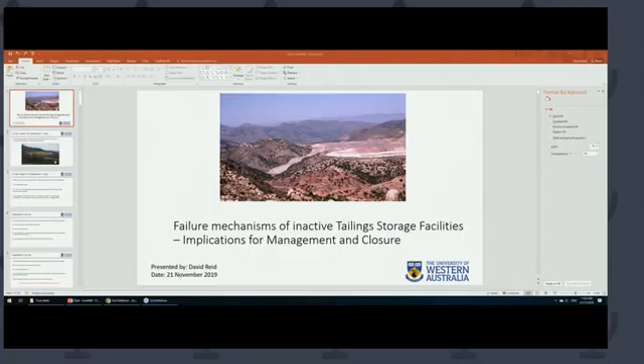The reason for this was I met some IMM members at an event a few months ago, and they were talking about the importance of tailings failures. When we talked about a potential topic, we formulated this for the closure group, because I understand this is the group of people most interested in the closure aspects. So it's to do with mechanisms of failure, or relevant mechanisms that still need to be considered after a tailings storage facility, or TSF, is either closed or fallow, or not having deposition.

This title slide right here is actually the Pinto Valley failure that happened in the late 90s in Arizona, on what was a closed TSF that closure works were happening on. In that case, waste rock was being placed on top as a cover. So it's not unprecedented that this can happen.

Now the real reason we're talking about it today, and that it's come to the focus today, is that the failure that happened in January this year in Brazil was a fallow TSF at the time of failure, and had been fallow for about 3 years. So that's something that I'm not sure...

A lot of people are aware a failure has happened. I'm sure some are aware there was no active deposition happening at the time. But that's interesting in a sense, because I think there's certainly a preconception, which is usually right, that once deposition stops and once things start to drain down or dry, things get safer, and that is generally the case. But there are still plausible mechanisms that can occur.

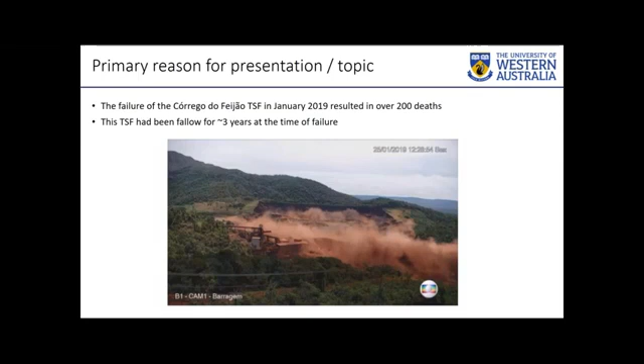I don't want to get into that because it's just speculation until all the data is out there. But the important thing to note is, this thing is looking, prior to it moving, there's very little externally visual evidence that it's about to happen. And that's what happens with very brittle, loose, saturated tailings when instability occurs. It can be very quick, and there can be very little warning.

And that's important for a number of reasons, because a lot of the things we talk about in terms of risk control is monitoring, daily inspections, walking over the TSF, which is great and useful, but not all failure mechanisms are going to be detectable a day before because of cracking. It can be a relatively small event that can take something like this TSF we're looking at here, that was already potentially in a very bad state. That final event that can cause this to happen doesn't have to be that big.

The reason that's the case is because of events that have happened over the past 10 years, for example, but that last event that causes it can be quite small. That's particularly important to think about in a closure context where we might have a fallow TSF, and the things that we're doing to them in a closure work sense are often relatively small. But if, unbeknownst to the closure team or to the people in that situation, it was already in a very delicate situation, even those small types of closure activities could be enough in some cases.

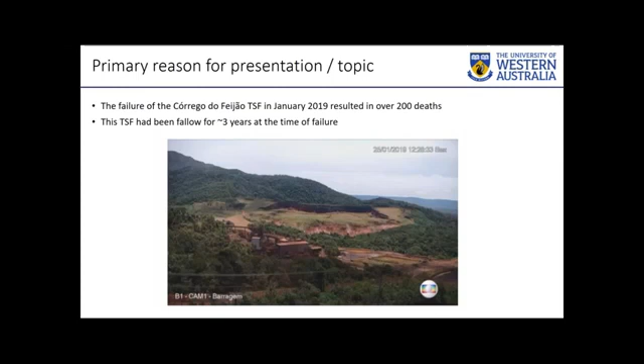Going back a step, I think it's fair to say there's a perception that when a TSF stops deposition, drain down things start, drying starts, that it generally gets safer. And that is correct, almost universally. But even if those things are happening, there are still plausible failure mechanisms that remain, even after it started to drain down a little bit or dry a little bit on the surface. And it's quite possible that something that was, because of the way it was maybe designed or operated, was pretty close to failure on the last day they turned the spigots off. And two years later, things might not be that much better.

So maybe it's 5% safer, but it might have been really close to the line already. And when we see the number of tailings failures happening, there clearly are probably a minority, but not an unappreciable minority, of tailings dams that might be in this situation. So we need to be careful whenever we start being responsible for changing things to a TSF.

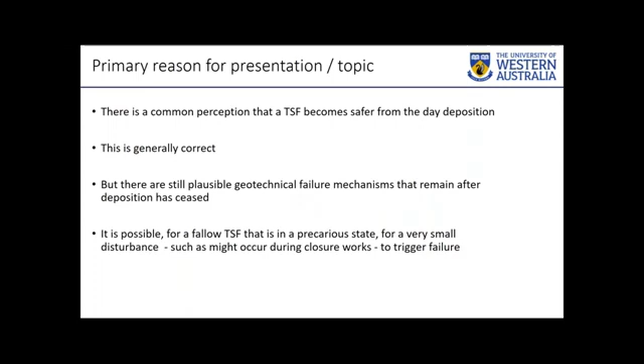So today, what I want to talk about is just a really high level background on some of the relevant soil mechanics principles that I think you need to be across in order to understand how these things happen. I understand the group isn't geotechnical engineers, so I'll keep it as high level as I can, but hopefully it's of interest when you're trying to read about what's happened on these things.

And then I want to discuss the types and rates of drain down we could see on some fallow TSFs by looking at some very conceptual models of what drain down would look like, which can be quite slow. I'm sure many of you who've been involved in seepage modeling or monitoring of a closed TSF will be aware of that.

Then I want to examine some case histories, some of which are closed TSFs, and at least one is not a closed TSF, but what happened there could still be relevant to a potentially closed or fallow TSF. I'll discuss the failure mechanism, summarize what we see in those case histories, and then offer some thoughts on what I think you'd want to look for coming at this from a closure works perspective.

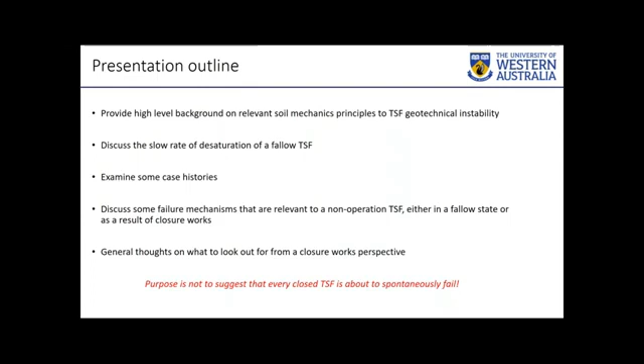Like what kind of things to think about at a high level that you want to make sure have been done. But I don't want to just be a panic monger and suggest that every single tailings dam, in this case every single fallow tailings dam TSF, is about to fail, because that's really not the case. I'm not saying that at all, but clearly we all would agree we need to be sure we know what the situation is in the ones we're working on. That's the real message.

Just to go through a really high level discussion on how soils and tailings behave: they're what we would call frictional materials. By that I mean their strength is a function of the stress acting on them. So the more stress that's on them, the more shear strength you have. And the way to link those two, in a simplified sense, is what we call a friction angle.

You can measure the friction angle of a sandpaper block on a desk. You apply a vertical stress by putting a weight on top of it, or using your hand, and then try to move it. You'll find there's usually a near linear relationship between the stress you put on top, acting down, and how much stress you need to apply sideways to make it move. That is what we call the friction angle, that linkage.

And so different grades of sandpaper have a different friction angle. A really coarse grade of sandpaper on a rough desk is going to take more shear stress to move, all else being equal. That's what we mean by frictional strength.

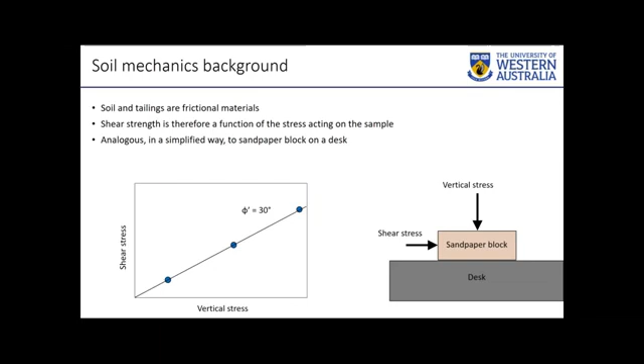It's not like concrete or steel. We don't normally think about how much stress is acting on a steel beam in a confining sense, usually in terms of how much tensile or compressive strength it might have. A steel beam is a steel beam generally. With soils, it's very much how much stress they're under that determines how strong they are. So things that reduce the stress can therefore make them less strong, which can be dangerous.

Similar to different grades of sandpaper, different types of tailings and soils have different frictional strengths. Beach sand might be in the low 30s, 30 degrees. An angular gravel material could be 45, anywhere in there. Clay can be in the low 20s, and tailings usually fall somewhere depending on the tailings, but you don't get many 20-degree friction angles in tailings. Usually they're a bit more angular because they've been more recently created and potentially broken down, so they might be more angular than a natural sediment that's had time to be eroded or rounded. So in general, friction angles might be a bit higher on tailings, but that's not the main point.

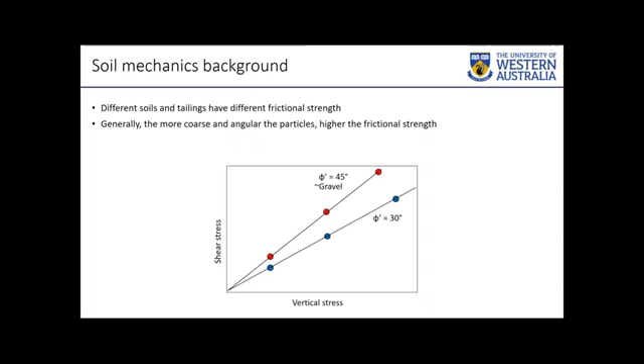The main point to get across with soils is, yes, they're frictional and their shear stress is controlled by the stress acting on them. But for soils and tailings, it's the effective stress that governs, not the total stress.

Effective stress in soil mechanics is the vertical stress acting on that sandpaper block from gravity, minus whatever water pressure might exist in between the sandpaper and the desk. In the sandpaper-desk analogy, it's hard - you'd have to really contort this to put water pressure into that situation.

In a soil 20 meters below the surface, clearly it's going to have water pressure acting on it of varying amounts depending on where the phreatic surface is. The higher the water pressure, the harder it is for the particles to touch each other and put pressure on each other, and that reduces the effective stress, which reduces their frictional strength. So they're frictional materials, but water gets in the way, you could say. The more water gets in the way, or the higher the pressure of it, the lower the strength is.

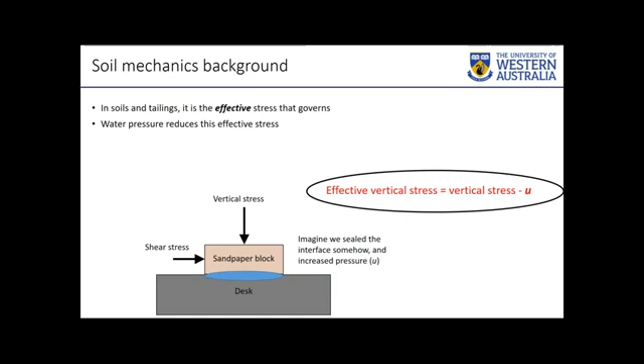Things that cause that can be very dangerous for tailings dams. Water is the key, and it's the key in a whole bunch of different ways, not just geotechnical behavior, but it's key here as well. That's why when you look at schematic plots of shear stress versus vertical stress, it's vertical effective stress that you'll see used in soil mechanics, and that's what matters - the effective stress. The water pressure makes a big difference in terms of the mobilized shear strength you can get.

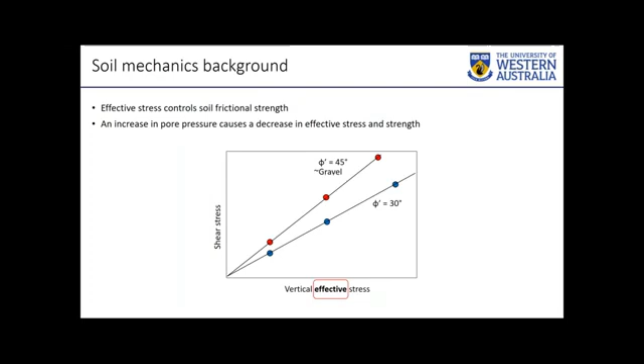So it's important to think about what is going to cause those pore pressures, the water pressure that prevents strength from existing inside our tailings. Vick, who's written a lot of great stuff on tailings, summarized it nicely into three broad categories. Number one, probably the most intuitive, is a high phreatic surface. The higher the phreatic surface in a tailings or soil deposit, the higher the water pressure at a given depth, and therefore the lower the effective stress in that element of soil, which means lower strength.

Another one that's probably quite intuitive is rapid placement of fill, or a cover, or a next wall raise on top of underlying tailings. That load, that instantaneous loading, can produce additional pressures in the water that are above those you would assume if you just calculated them based on the phreatic surface. We call that a form of excess pore pressure, and that's pretty well understood, at least in the geotechnical community.

Number three is the trickiest one. I'll be honest, a lot of people working even in tailings struggle with this one, and that's shear-induced pore pressure - the process of particles being sheared causes them to collapse and increase pore pressure. This is almost certainly what's documented in the failure that happened in Brazil. You see this in every geotechnical tailings failure: loose tailings, when sheared, collapse, try to reduce in volume, and the pore pressure goes up. I'll show schematics to explain that, but that's usually the most risky one and the one that happens fastest.

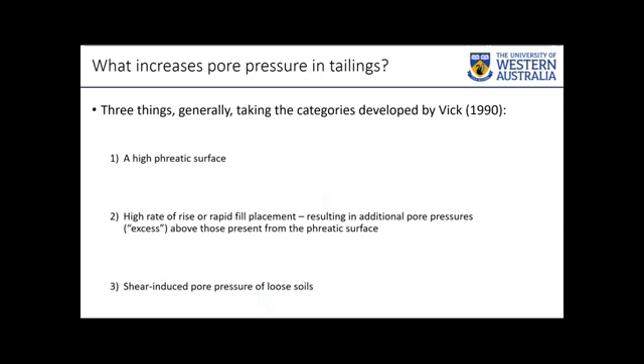Now, the high phreatic surface one is again probably the most intuitive. Even if you're not a geotech, you're aware: high phreatic surface is bad, low phreatic surface is good, generally. So looking at a rough schematic of an upstream raised TSF, let's say we're looking at this element of tailings here, and we're worried about it from a stability point of view - the strength that it has might control whether this slope is stable or not. If we have phreatic surface 1, the effective stress acting here is less because the water pressure is greater.

So this whole system is more risky with phreatic surface 1 than with phreatic surface 2. That's, I think, straightforward.

What's interesting is if you have this slope and it's not in great shape, and you go from phreatic surface 2 to phreatic surface 1, that reduction in itself can trigger a failure. And that rise can be slow - there's a misconception that it has to be some kind of rapid event. It could gradually rise over a year. And if, at that point, things are not stable, the failure will occur, and there might not be that much warning depending on the type of tailings.

So phreatic surface is key. Again, this is why almost certainly closed or fallow TSFs are considered safer, because usually you're going to be moving from 1 to 2. But the key question we'll talk about later is how long is that going to take? Because it can take a long time in certain materials.

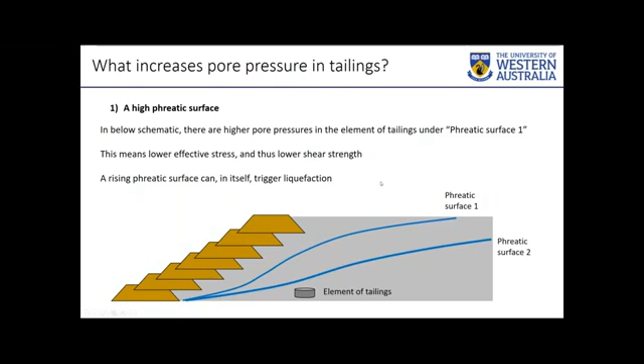Now, excess pore pressures is the term we use to describe pore pressures that are higher than you would calculate based on the location of the phreatic surface. Because if you know the location of the phreatic surface, you'd say, okay, this element of tailings is 10 meters below it, so it's 10 times 9.81, and that's how you calculate pore pressure - 98 kPa.

But if you, for example, load this quickly by placing a bunch of waste rock here in a hurry, or building a wall raise, or even depositing tailings really quickly, what happens in soil is the water bears the load initially. If you load something very quickly, it's the water that bears the load, not the soil, and therefore the water pore pressure goes up. The water can't get away fast enough to dissipate that excess pore pressure. So clearly, if we do things like this - placing load rapidly - it could increase the pore pressures beyond what we think they are, which again can be a trigger for failure.

So that's something to keep in mind, because this becomes relevant, in particular, to when you're closing a TSF. The key question then is: is the tailings still saturated? Because if it isn't, putting that load there might not be as much of an issue, since it can't generate water pressure anyway, because the tailings aren't even wet in the first place. But that's another discussion for a few slides.

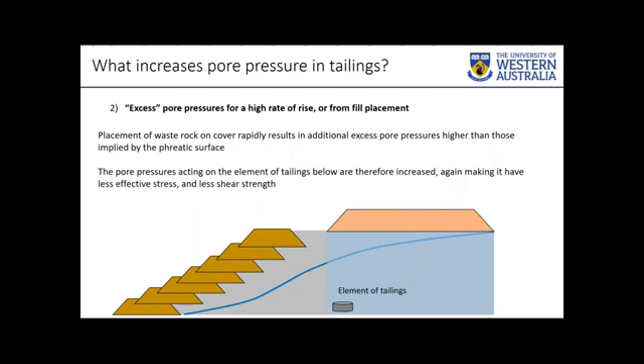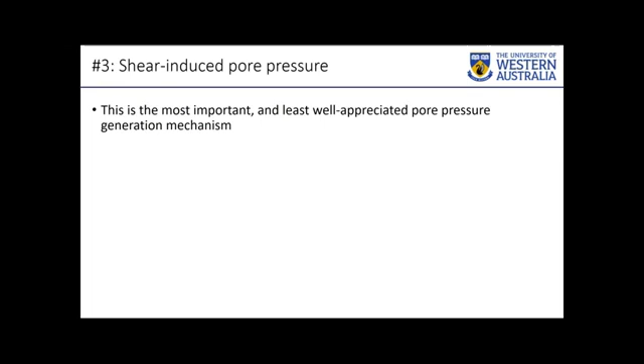Now, shear-induced pore pressure - it's really important to understand what causes this, because it's so relevant to tailings, and it's hard to understand a lot of the failures without a high-level understanding of this. Let's imagine another one of these PowerPoint schematics of an element of soil in some sort of lab device that lets us shear it. It doesn't really matter - we don't need to get into the nitty-gritty of lab testing.

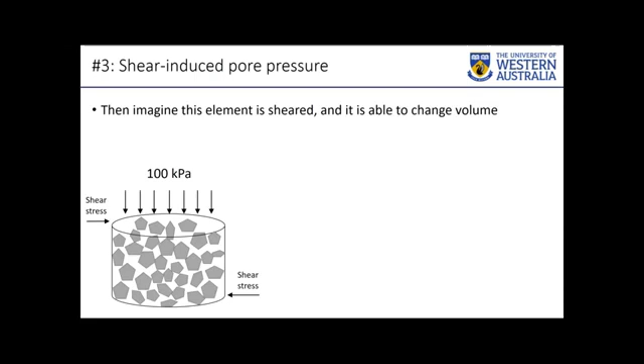We load it up under 100 kPa of vertical stress. Let's say this one doesn't have any water in it, so pore pressure isn't going to build up, and it can change volume because air is compressible. So if this sample wants to change volume, it can do so. Let's apply a shear stress to this - let's simulate what happens below the slope of tailings when it's loaded, and shear it.

What's really important is that if this tailings is loose - and I've drawn these schematic particles in a loose arrangement - when shearing makes them try to move across each other and distort somewhat, loose soils will try to get denser. Because the moment you start disturbing the structure, if it's already loose, the particles find a more efficient packing arrangement. That's fine, and it's good in a way, if it can get denser without pore pressure building up. So if the sample can change volume freely, as you shear it, it will get denser.

We call that in soil mechanics contraction, and loose samples do this. If you took the same material on the left and compacted it very densely, it would actually increase in volume, because in order to shear, the particles need to move over each other and get bigger. But unfortunately for us, tailings are rarely in that dense condition - hydraulically deposited materials are almost always contractive to some degree.

Even filter tailings, if they're not compacted, are contractive. They're loose, I should say. They might not be saturated under most conditions if they were deposited dry enough, but they're usually loose if they're not compacted. So most of the materials we're looking at are going to be contractive.

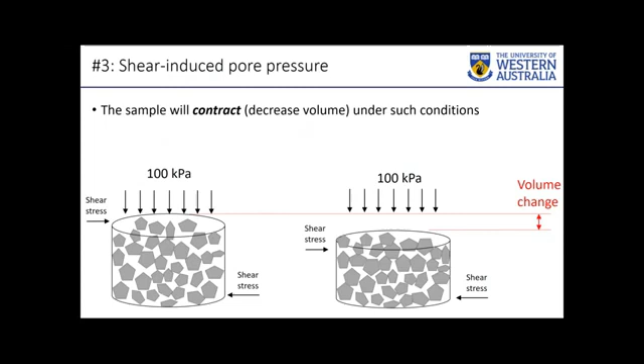So this could play a role for us. We have to be careful about this. Take the same element of soil, same condition, same lab test, everything. Let's fill it with water, and let's make this lab device a type where we can seal it, so we won't allow water to enter or leave the system, and it's fully saturated.

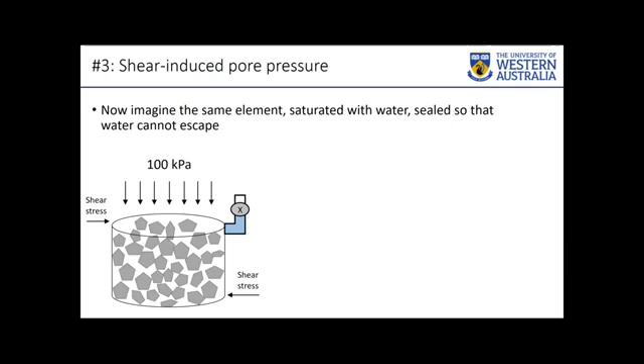Now if we try to shear this element of soil, but it's full of water, the water can't go anywhere. So it's what we call undrained. The volume can't change, so the particles want to get closer together. That's what they want to do as it's being disturbed, but they're unable to because the water is in the way. It can't go anywhere. So what happens is the water bears the load, and that causes the water pressure to go up, in some cases to incredibly high amounts, to the point where the sample is almost liquefied.

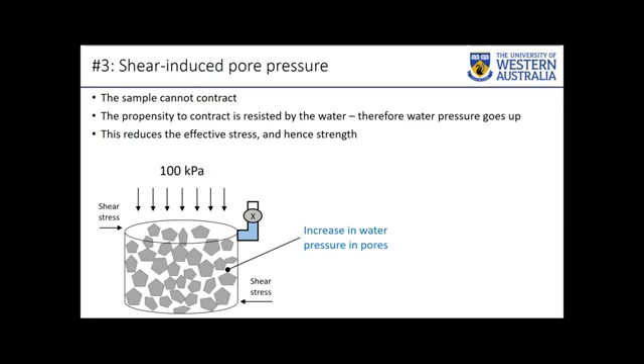And that's what liquefaction really is. The simplest way to describe it: some disturbance happens to this element of soil, the particles try to get closer together in a hurry, they can't do so because the water's in the way. The water pressure spikes, and if water pressure spikes, the effective stress goes down and the strength of the soil goes down. That's the simplest way to describe static liquefaction, which is a very common failure mechanism.

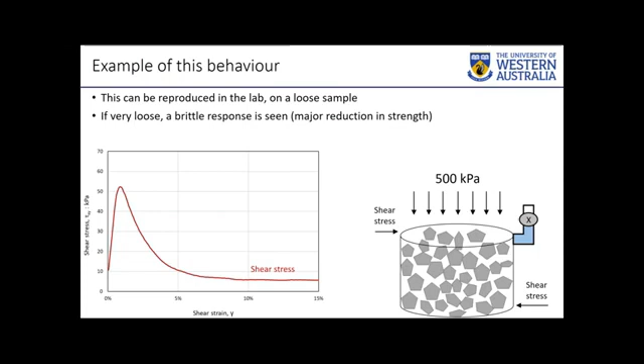And it goes from the peak strength to the residual quite quickly. So that's one of the reasons you often won't see evidence of a failure in some of these brittle failures, or evidence before it fails that it's going to fail, because it's such a brittle process.

So as this same test is running, we're recording pore pressure, and we see that the excess pore pressure inside that sample has gone up to 490 kPa. So it's lost almost all of its effective stress, which is the reason it's lost its strength, because without effective stress, the particles can't act on each other in a frictional manner. So it's losing its strength.

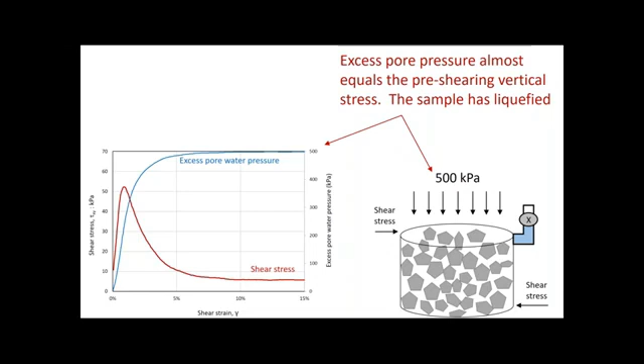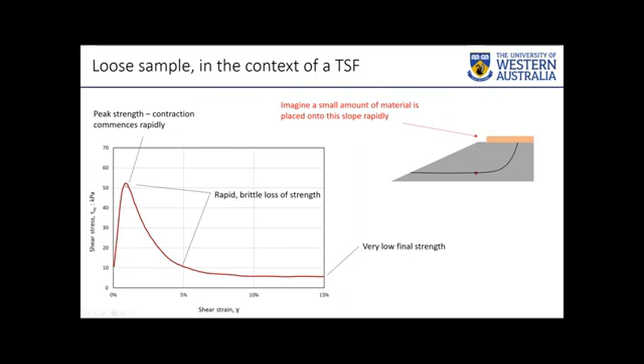So this is the simplest way to describe static liquefaction, which is really what we want to be very careful about when we're disturbing or changing tailings that we don't know the condition of, that could be loose and saturated. Because placing that last wall raise, or whatever the case may be, disturbing it in that sense, could be what pushes you over the top of that peak, and then causes you to lose that strength.

When that happens, that's why things flow. You can imagine if all of a sudden something's happened in this tailings dam that's caused an element of soil to exceed that peak, and all of a sudden lose 90% of its strength, it's going to have to move a very great distance to reach equilibrium again, which means you have what we call a flow event. So that's fast moving, brittle, little warning, and a great distance of travel, which is clearly a very dangerous combination.

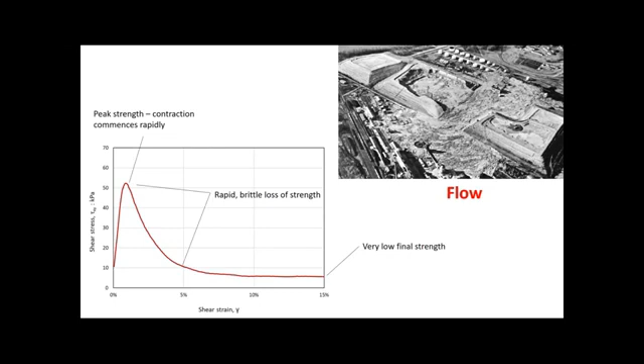Everything I've talked about so far assumes the tailings or material in question is either saturated or very close to saturation. But if we remove the water, or significantly reduce the water pressure, things immediately get better.

That's what we talk about with how a fallow or closed TSF is usually getting safer, and it almost always is. But the question becomes, if we turn off the spigots today, how many years until we see really important improvements? That's not the easiest question to answer.

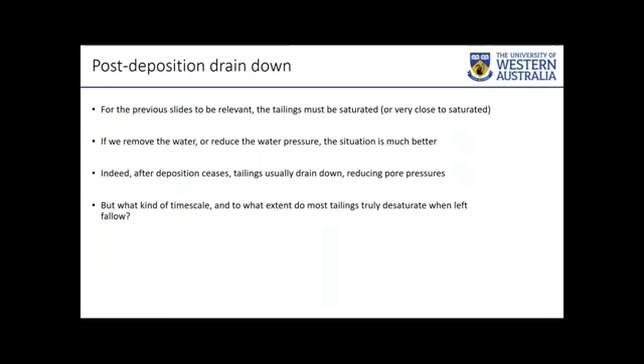I'm sure many of you have been involved in seepage predictions of these things, and it's not actually the easiest thing to predict. I've been involved in a number of fallow TSFs where we've gone back 10 years later and found a phreatic surface well higher than we would have wanted it to be, and much higher than probably everybody would have thumbsucked at the time.

Just to give a very simplified approach to quantify what kind of time numbers we're looking at here, I've made a simple column model with two arbitrary but reasonable tailings strengths, permeabilities, and what you'd call soil water characteristic curves, or unsaturated soil characteristics.

One I've taken to be something on the sandy silt side, maybe your gold tailings near the perimeter where it's segregated a bit and sandy silt. The other one, on the other extreme, being maybe your clay tailings - maybe your iron ore, some of the clay-rich iron ore tailings, or maybe some bauxite residue or alumina residue.

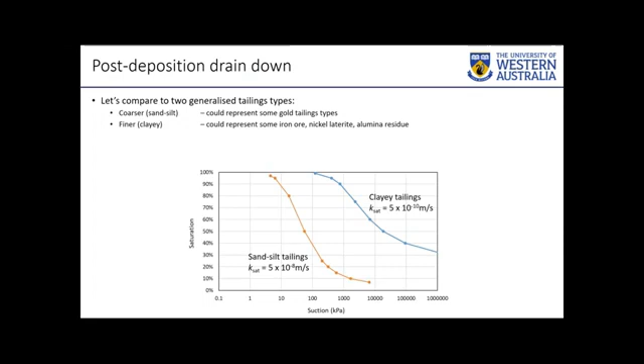This to me is kind of a rough span of a lot of the tailings we'd be dealing with in Australia. That covers just a bit of a broad range, just to look at two scenarios here.

Let's just, for argument's sake, take a 50-meter high column of that tailings, of both types, and let's say we turn the spigots off, and we had a really good drainage system so it can drain out the base freely.

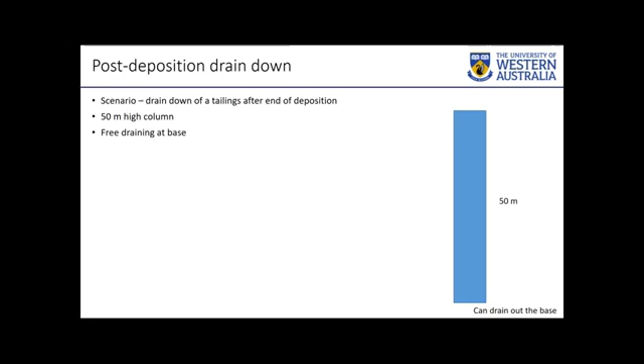Now, that in itself is probably a non-conservative assumption, because a lot of the cases we'll be sitting on top of another 20 meters of some kind of clay material perhaps, which makes everything we're talking about now worse. But just for argument's sake, let's assume it can drain freely from the base - it's either a sand foundation or there was a good sand drain in the bottom.

What you see is that the pore pressures become negative, which is great, because that means it's probably desaturating to some degree, and or it's stronger anyway, because negative pore pressures are better than positive pore pressures for strength. So that's good - it is draining down.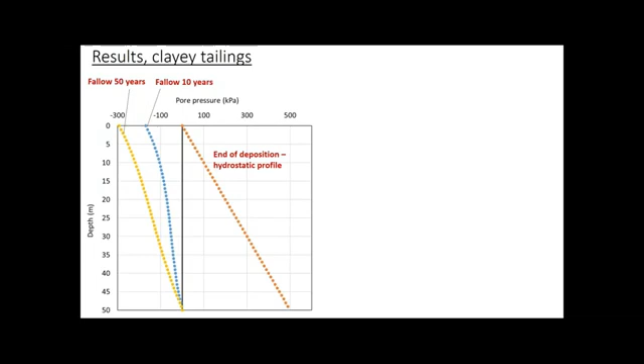But what we see is, because of material like clay - if you're getting into the clay end of the spectrum here - yeah, sure, negative pore pressures start to develop, but that doesn't mean it's become highly unsaturated, in the sense that there still could be, in a lot of the tailings, pores almost entirely filled with water, because clays take a very, very long time to drain down and lose that water.

And they never lose it all. Clays actually hold on to, or almost never lose all of it - they always hold on to their residual water content.

So in this case, this whole schematic or scenario is assuming no recharge - there's no new water being dumped on top, which again is non-conservative, but easier for the discussion.

So yes, this tailings dam is much safer, much safer. At 10 years fallow, it's much safer, but it's still potentially very close to saturation. So if we go and start throwing a bunch of rock on top of this thing, that could generate pore pressures, because if you're 98% saturated and you throw waste rock on top of it, it will become saturated and pore pressures will generate.

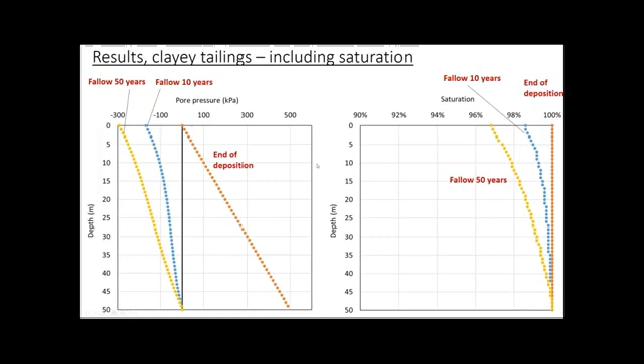And again, if it wasn't clay, if it wasn't free draining at the bottom, this would be worse. When I first put this schematic together it didn't make sense to me, because I know I've been involved in TSFs that are still very saturated after 10 years - but that's because this is a free draining scenario, whereas that one was not.

If you switch to sand silt tailings, things are better. In this case, if you're free draining on the bottom of a sand silt tailings, you're probably getting after 10 years to a point where, even if you did throw waste rock on top of that, it's not going to generate pore pressure, which is good because that means stability is better.

Now turning to Brazil, that's a much wetter climate than we often deal with, or a lot of parts of Australia would deal with. So this scenario, this model is nonsense for that one, because it's constantly being recharged by wet seasons. It's not going to drain down anywhere as efficiently as this.

There's been published data showing that it still had a pretty significant phreatic surface in it 3 years later. So maybe this is just a great discussion on the time scales we're looking at here.

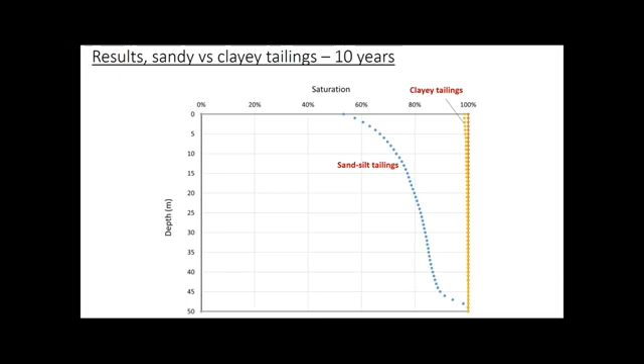Even in a situation where everything's perfect, where you have a sand drain at the bottom and no recharge, your clay end of your spectrum is going to be almost fully saturated even 10 years later. So the water situation gets better, but it doesn't get better to the point where we don't have to worry about stability.

I guess I've already kind of covered this discussion topic. It's worth noting, maybe everyone's aware of this, but very often the initial tailings that are deposited are more clay than the ones deposited in the last 5 or 10 meters, because in many types of deposits you're getting into the fresher rock as you get deeper.

So if you're going to be studying this problem and taking samples, you might want to be looking at the stuff from depth, because if you just grab a bag of sample from the beach, it may not be as representative of 20, 30 meters down as you'd want it to be, in a non-conservative way.

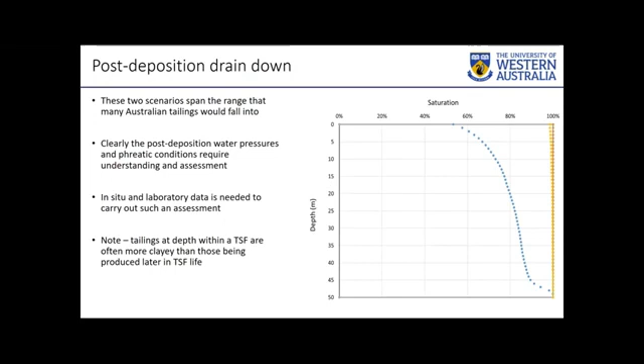We have the technology, I'm sure a lot of you have worked in this, to model this and look at all these scenarios. It just requires some relatively good types of lab testing and a relatively comprehensive type of model to understand what's going to happen.

So with a little bit of geotechnical background there, if that was of use for anyone, I just want to talk about some TSFs, some of which, and one non-TSF, were closed at the time of their failure, and one was not, but is close to home and is quite relevant because of what was enough to trigger the failure there.

So Simmergo in South Africa, which is an interesting closed TSF failure, or just recommissioned. Pinto Valley, which is a kind of classic one because they were doing closure works on it. Cadia, which I'm sure everyone's familiar with, but I'm not sure how much you've seen about what the panel feels was the actual trigger mechanism of that failure, and how it wasn't really that much.

What was happening to it at the time that might have pushed it over the edge wasn't that much, and it had been a case where things had been building up for a while. I think there's evidence to suggest that. So that's interesting, because again, the things they were doing at Cadia weren't enormously different to what you'd be doing in some closure applications in terms of the disturbance happening at the last second.

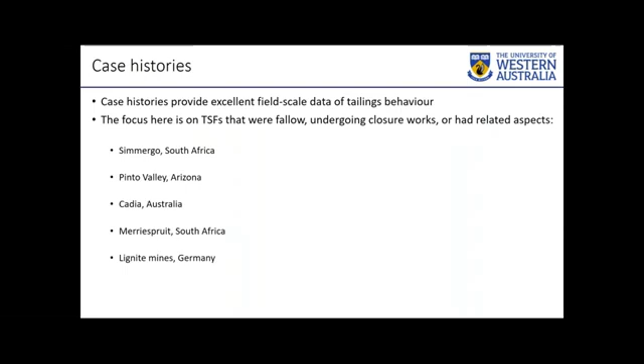Merriespruit in South Africa is interesting, and it was closed at the time. Now sure, they were doing insane things, still putting water into it in a very bad way, but it was a closed TSF. There wasn't rapid rise happening anymore. And finally, these lignite mines in Germany, closed coal deposits, which I'm not sure how familiar you are with, but they're a very interesting case history, again talking about a closure situation with this kind of static liquefaction occurring.

So Simmergo is very interesting in that it kind of draws upon those seepage models a little bit, in that it was an upstream raised TSF in a pretty arid environment in South Africa, and it had been fallow for 20 years at the time the failure happened. There were no pore pressures in the tailings based on piezometers. They drained down in the sense that there wasn't a hydrostatic profile, but they were very, very close to saturation - so very similar to one of those models shown earlier.

They wanted to hydraulically remine the TSF, and as part of that, in one of the areas, they were storing some slurry on top of the tailings dam.

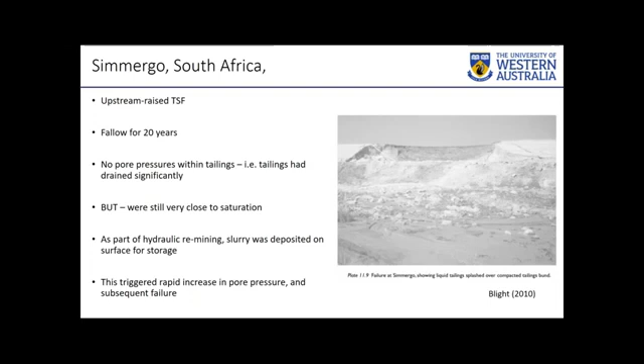So this is clearly relevant, I think, to what can happen to a closed TSF if it got hit with a large rain event after closure, maybe bigger than it had experienced during the operational years. If we went back and started doing things to a TSF, a very relatively small change in events here was enough to cause this rapid increase in phreatic surface.

Not to say you couldn't do things like this, but you need to, if you understood the slope and had monitored properly and had all these controls in place, you would have known in advance and been able to deal with it. But this was the 90s, so probably the understanding wasn't there, and it wasn't being looked at in the detail we should be looking at it now. But I think it's a really useful case history in this context.

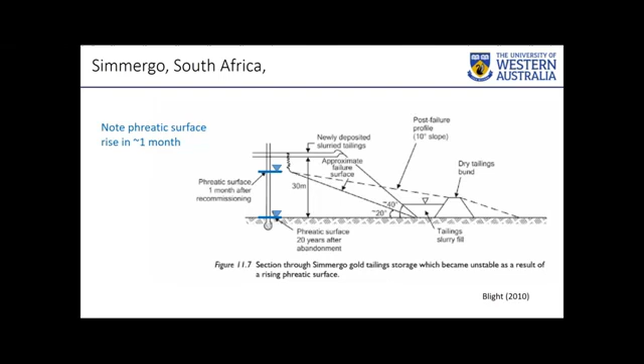Pinto Valley is a really, really useful one. This is a closed TSF, upstream raised, in an arid environment. So precipitation-wise, this is quite relevant to some areas of Australia. I don't know how long it was closed. I haven't been able to figure out or find how much time passed between end of deposition and when they were doing what they were doing, which is unfortunate because that's relevant in terms of how much it would have drained down.

So a flow slide occurred down a river when they were placing waste rock on top of it as part of cover works. Now, throwing a whole bunch of waste rock on top of an upstream raised TSF probably would ring alarm bells regardless of whether the Brazil failure or what we understand about geotech engineering.

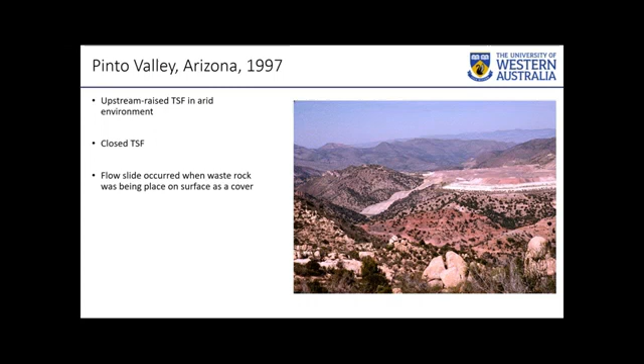But probably I would assume there was the view at the time that the tailings had time to drain down. But what appears to have happened here is that maybe they did drain down to some degree, but they might have still been very close to saturation. So if you put a 20-meter lift of waste rock in a rapid way on top of tailings that are at 99% saturation, that's going to cause them to resaturate and potentially drive up their pore pressures.

This is a photo of the failure looking at it from the top of this hill, but from aerial. So that's the top of that hill, that's the failure area, and that's flowing down the river. The waste rock had covered most of the interior of the TSF, it was only in one of the first places they got near the edge that this happened.

But again, that's not to suggest waste rock covering of a TSF isn't a great, or potentially encapsulation isn't a good thing to do. All they needed to do was control how thick the waste rock was, or how long they had to wait between placing it, or put some of it around the perimeter as a buttress, and they would have been able to do this. It's not to say encapsulation is bad, but understanding the conditions here would be critical if you're going to try to do this.

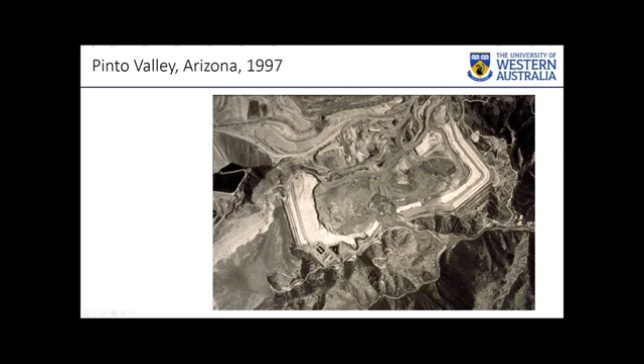There were no fatalities at this site, but it was pretty close from the look of this. This shows the people working on those lifts right when the failure happened, or the vehicles.

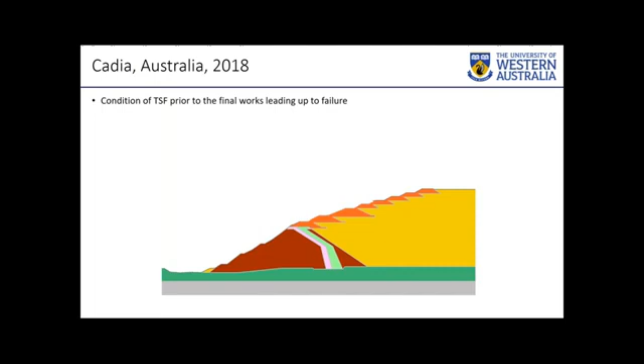But they've been very nice in sharing data. So this is the TSF leading up to failure. The dark brown is what was initially constructed as a large, more conventional downstream TSF. Orange are wall raises from when it was converted to an upstream TSF. The pink and green are a core. The green foundation material turns out to be a lot more clay rich than the general understanding of the site had been. So the particular area where it failed had a foundation that was a bit different to elsewhere.

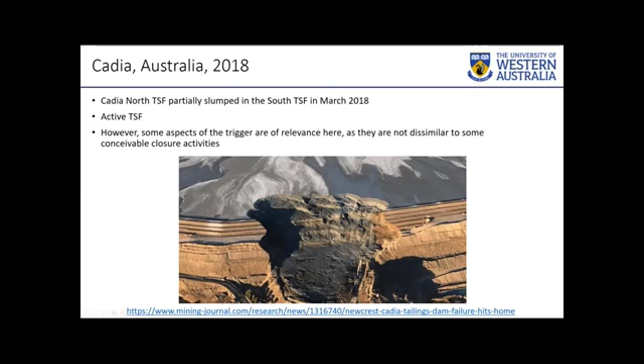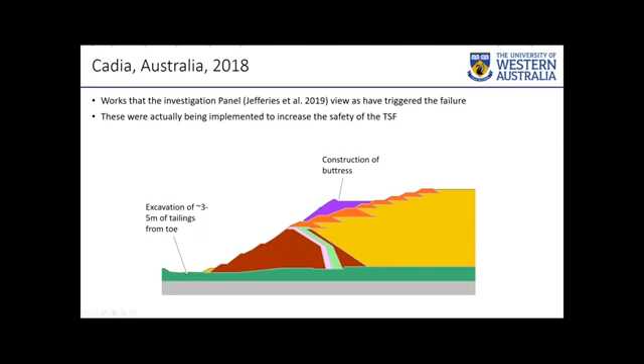Now what was happening, essentially, that the panel believes led it to trigger, was two things. A buttress was being constructed to increase the safety against failure mechanisms acting through the tailings, which are generally the worst ones - usually it's not going to fail through a large engineered downstream dam. Also, to enable buttressing from the ground up, excavation was happening at the toe of about 3 to 5 meters of tailings that had built up there, since this area is close to the other TSF and there was some overflow material there, I understand from the report. So two things are happening: a buttress is being constructed, and material is being moved at the toe. In combination, that could potentially be an issue, as it appeared to be here.

As it turns out, the panel inferred that this more clay material, prior to these additional works happening, was already being weakened and shearing as a result of all the wall raises built over the years. So things were already not going great in this clay. That means these relatively small additional disturbances were enough to trigger a failure. They caused the clay to move to the left even more, which then caused - without getting into geomechanics - a type of extension stress path in the tailings, triggering liquefaction.

And then that localized flow. Now, for closure, the thing I really want to focus on here is: if you come to a TSF, it's not unusual that closure works could consider things like cleaning drains, reshaping slopes, or putting cover material on slopes. I just want to draw your attention to the fact that if one was unlucky and ended up doing those things to a TSF that, for no fault of your own, had historically been in a not great situation, then you don't want to be the one standing there holding the bag - saying we just put a 1 meter cover zone on here, we just had to clean some drains at the toe. You just want to be careful that you're not in a situation where that could be what does it. That would be the message, I think.

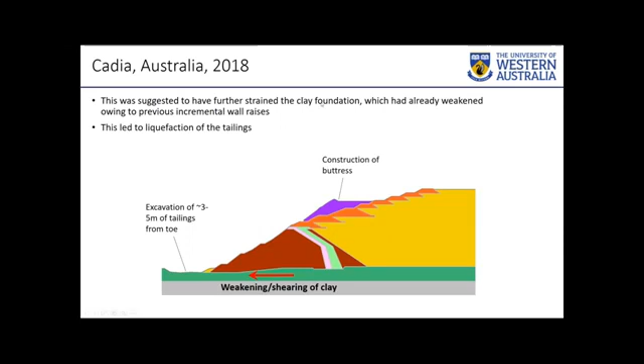Merriespruit was an upstream raised TSF in South Africa that failed in 1994, resulting in 17 deaths in the downstream village. It's a sad story that the original plan was to put the village on the other side, and put the TSF elsewhere because of where the process plant was going to go, but it got changed around at the last second.

The TSF failed while it was closed nominally at the time, but it was still being used for water storage, which didn't help. It had a whole bunch of problems through its life, and in particular, where it failed was a bit of a low point which had always had the most loose, saturated tailings. So this area was always a potential area of risk.

But there was no real tailings deposition happening when it failed, so it just shows it doesn't have to be actively deposited to be a risk. It flowed up to 4 kilometers, quite quickly, and it took houses right off their foundation, sheared them right off.

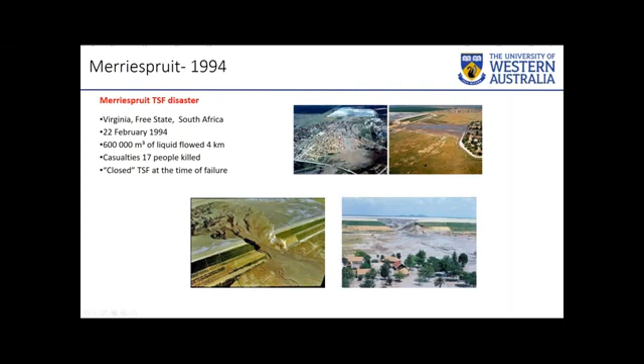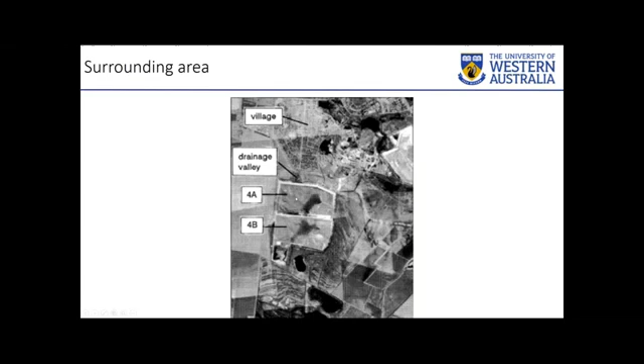So what had been happening is, yes, it was a closed TSF, but there was another TSF next to it, and they were using this one for storing some additional water. Because of a long history of not great deposition and other problems, that water didn't really end up in the decant. There was a low point up against the crest, which is obviously not great for a number of reasons.

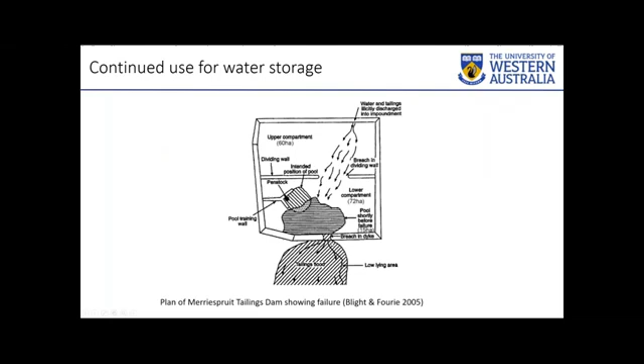In this case, a rain event occurred as well, which was enough to cause overtopping. There was not much freeboard. It caused overtopping, which then caused some erosion. So it's not the overtopping so much—even though the overtopping is terrible and we'd never want that to happen—it's what the overtopping did.

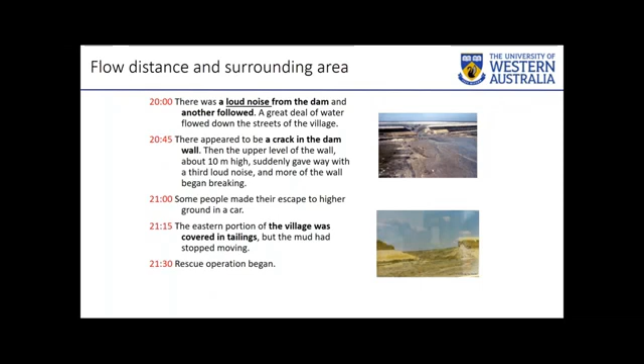The overtopping started, and then later in the night there was a loud noise from the TSF, and the flow through the village ended up being much stronger after these loud noises occurred. This is something you hear a lot about on these static liquefaction failures—eyewitnesses report a banging noise or a really loud bang when they fail, and that's the brittle loss of strength happening inside the tailings when they release.

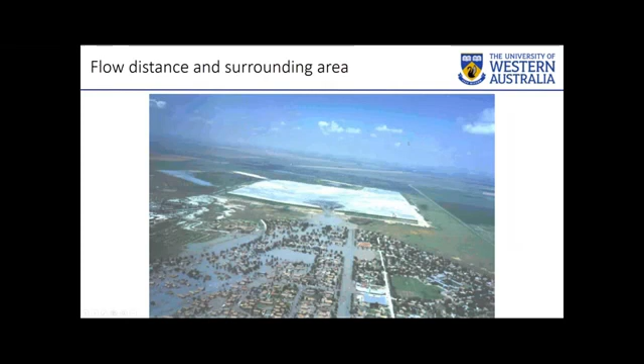That's another picture showing the size of the depression. It wasn't even that big in the context of the whole TSF, and the amount that discharged wasn't that high a percentage. But it's the erosion I want to draw your attention to as a trigger mechanism. Overtopping is something we'd never want in any circumstances, but it's what the overtopping did, and how small an erosion it needed to be to do it, that's interesting.

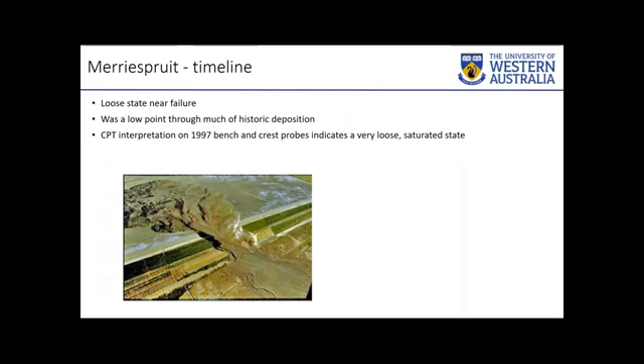Coming back to that idealized laboratory test, the material in there was that kind of stuff—very, very loose, because silty tailings that deposit through water subaqueously are usually the loosest and most dangerous, since they just form a looser structure. So coming back to these very basic schematics of what was happening, you had a situation where it was already saturated.

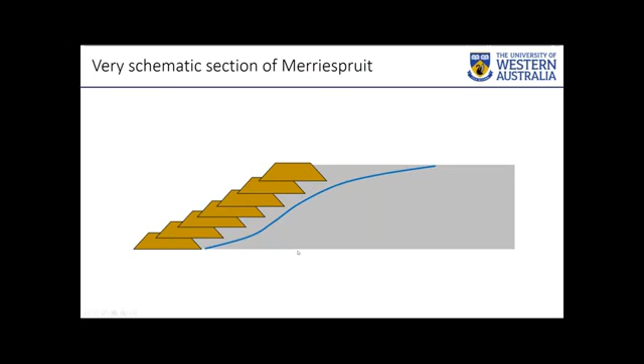Despite being closed, this low point was already always saturated because of the location of the pond. You then have a further rise in that standing water because of a rain event. Overtopping occurs, causing erosion, chewing out the toe in that area.

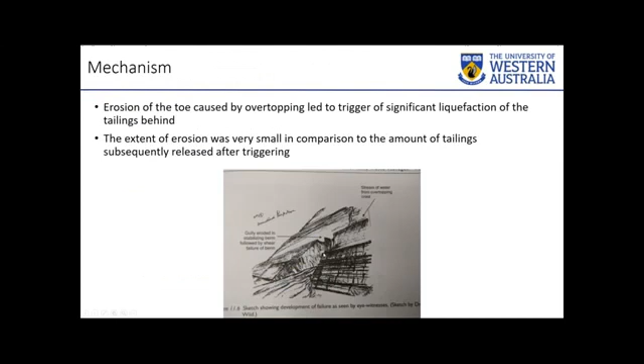This TSF was in a situation where, especially when you consider 3D effects, not that big of an erosion event was enough to start triggering liquefaction in the tailings behind. Because if you remove toe material, you're increasing the shear stress in there. It's like making this slope steeper, right?

So if you have loose tailings that are already on the line, already really close to that brittle contractive behavior, and you all of a sudden take the toe away and increase their shear stress, that's a good way to trigger liquefaction. So it's relevant for a number of reasons.

Erosion is something we want to consider in closure works. Closure water management is clearly quite important. And again, you've got a situation where, sure, standing water is bad, erosion is bad, but to make it that particularly catastrophic event, you needed a situation where things had been going bad for some time, in terms of this whole area always being a high risk area. So a few things combined, all of which are relevant in a different way to closure situations.

These rehabilitated coal mines, coal waste stockpiles in Germany, are interesting for us in the tailings world. When Andy Fourie showed me these slides, because he'd found out about it at a mine closure conference in Europe, it was really interesting because we'd never heard about it in the tailings world. Maybe as closure people you're more familiar with these things. So these are Andy Fourie's slides, which he's allowed me to use, so thanks to him.

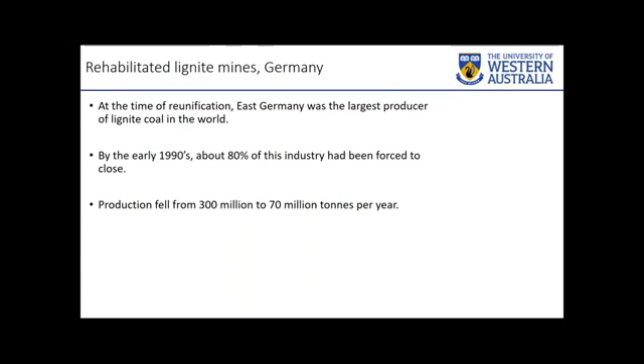And what happened is in some of these closed mines, what they were referring to in their literature as a 'ground break' appeared, meaning a significant flow of material without any real warning, causing damage. And then they started happening at a greater frequency, and apparently there was a real lack of understanding of what was causing this.

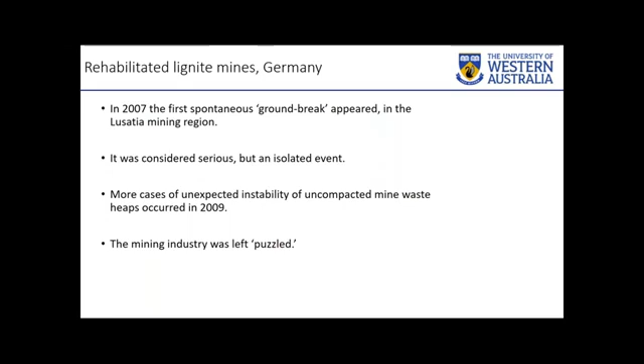Now, apparently this is even worse in that a lot of the land, once these mines were closed and handed back, the land near the lakes was actually considered good real estate, and some building happened in that area. So it wasn't just failures, it was having effects on real estate and evacuations and these kinds of things. There's now been more than fifty.

A paper, I believe at a mine waste conference, was talking about how some people working in the area didn't really understand geotechnically how this could be happening, given there was no real strong external trigger that they were aware of. They couldn't understand why that would happen without a strong external trigger. I think we actually do have a geotechnical understanding to explain these, which I'll briefly show. But I think they're interesting in a closure sense, even though they're not strictly tailings.

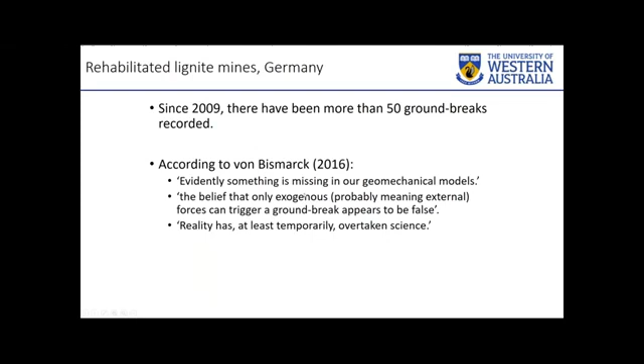So to get into more detail, a lot of the waste from these mines would end up back in pits, placed there very loose without compaction, which wouldn't be surprising - why would you really compact a loose material? To enable mining to occur when things were active, there was a lot of dewatering happening, resulting in a depression of the groundwater level.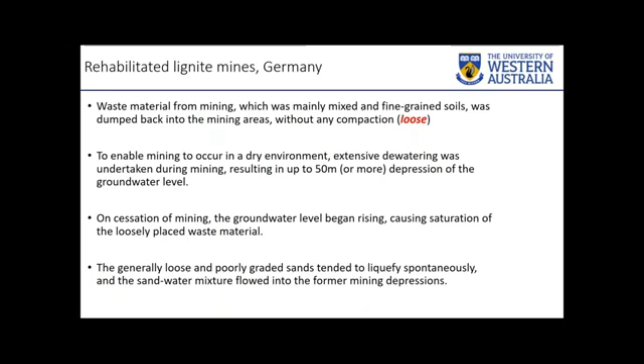So then you turn around and close all these mines. A lot of the dewatering works stop, and the groundwater level starts to rebound back. But that causes, in areas in these pits or near these pits where you have waste stockpiles placed very loose, the pore pressures in them to start increasing. Increasing pore pressure means reducing strength. And if you have these loose materials, they're the type that can then exhibit contractive undrained shearing, contraction, increase in pore pressure above and beyond just the rise of the phreatic surface.

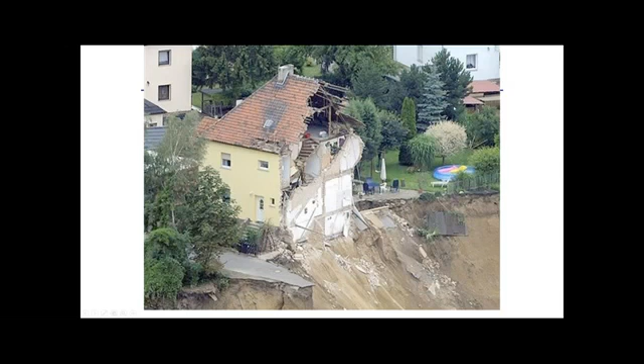This is an example of the effects of one of these events on real estate in the area, when you start having these failures that occur and propagate backwards progressively. Clearly a lot of evacuations occurred because of this, and a lot of land and real estate had to be abandoned.

Some have been quite large, even over 4 million cubic meters of flow, with some fatalities in some cases. Houses submerged, hundreds of meters to a kilometer of area, and they're quite quick, with little warning, very similar to how we see a loose tailings potentially fail.

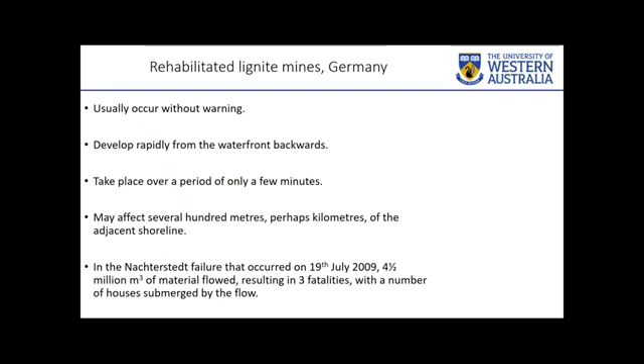So what could be happening in this image is if you've got a whole bunch of waste material placed loose, it's at risk of that contractive behavior, and all of a sudden you start rising a pit lake because it's rebounding, or even seasonal effects, that's reducing the effective stress inside some of that material. That reduction in effective stress reduces the strength, which can then cause that kind of brittle shear straining, which could lead to that exact behavior in that video.

So again, water pressure is almost what always does it for us - the higher the water pressure, the more dangerous things are. Not a tailings dam here, but certainly of interest from your closure perspective, as an interesting case history. Andy's been trying to get more information out of this because it's such an interesting case history, but he hasn't been that successful, so I don't know where they are. They must have done more work on this since then to understand it and risk manage it, but I'm not personally that aware of what's happened.

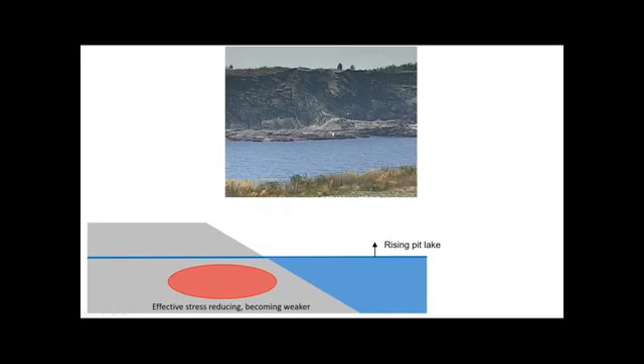So just to summarize the mechanisms that could trigger a failure that still exists after a TSF is closed - those could include things like a major rain event, which you could easily have a few years after a TSF closed that was bigger than anything that happened before. So it could actually put a closed TSF in a worse situation than it had ever experienced as far as water pressures go.

That's a good example, because if you have a 10-year, 20-year mine life, and then that TSF sits there for 50 years, still close to saturation, and a lot of water gets dropped on top of it, you could then be in a worse situation than it had existed during deposition, even though it's fallow.

If they're being used to store water, and/or storm events are happening, and now the infrastructure has been removed, and the plan is to leave water on top of it in some circumstances - if that water gets to a higher level than it had ever been, again exact same issue. Things could be worse, even in a fallow situation, if a lot of water comes into play.

And the types of earthworks that sometimes happen in a closure setting can be enough to trigger this if the TSF, owing to reasons that happened long before closure work started, was already in a delicate situation. It doesn't need to be - these things can be right on the line, and if they are, it wouldn't take very much to push them over that.

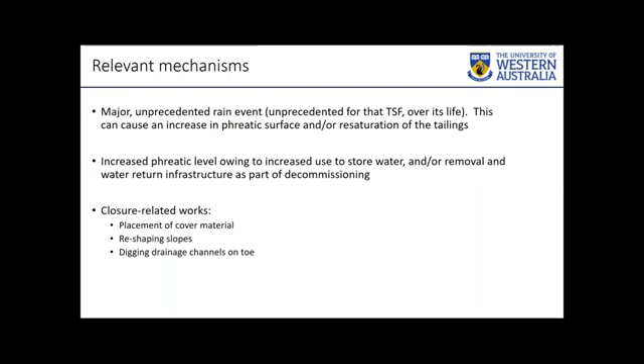So again, I guess some important points to summarize at this level: a fallow TSF could be really close to the edge of failure because of nothing that a closure team has done. So you just want to be careful that you don't put yourself in that situation. And water management - you just want to say water over and over again. I think everyone's aware of that, but certainly geotechnically, if you can get rid of the water pressures, you're in great shape.

And that's why people are so keen on filter tailings, although it's not without its problems, because a lot of filter tailings don't end up as dry as we'd all wish or hope they would be in the design. So I'm aware of filter TSFs that definitely have saturated regions inside of them, without a doubt, that we've seen.

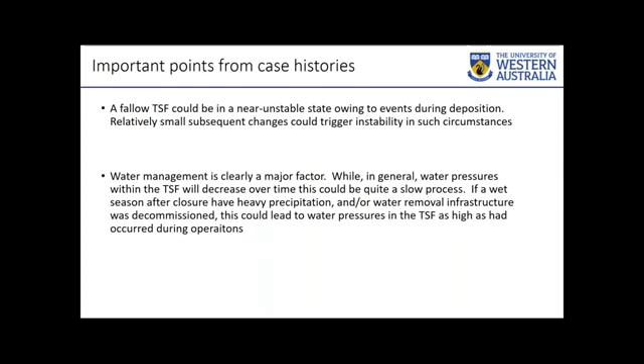I'm a geotech engineer, so I don't want to talk up geotechnical engineering here, but good geotechnical advice and understanding of the situation of a closed or fallow TSF is key if you're going to start changing it. Another point, looking at it a different way, is if there's a stability analysis report on the TSF saying it's fine, but it was done 15 years ago...

I can almost guarantee that 15 years ago, the level of rigor and conservatism applied to tailings stability was less than it would be today. That's just the way the industry has moved - because of the failures that have been happening, there's a lot more understanding of these mechanisms. So 15 or 10 years ago it probably wouldn't be as robust as if it was done today. That's important to remember if what you're relying on has been sitting on a shelf for 20 years.

It's unfortunate, but loose, brittle tailings are very common in many TSFs. Placing material hydraulically is not the best way to get it dense, so if the materials are saturated, they're very likely to be loose. A good understanding of phreatic conditions, and particularly how they're going to change over time, is key for all of this. If you think it's going to take 50 years to drain down, or 10 or 5, that's going to really change your decision making on some of these things.

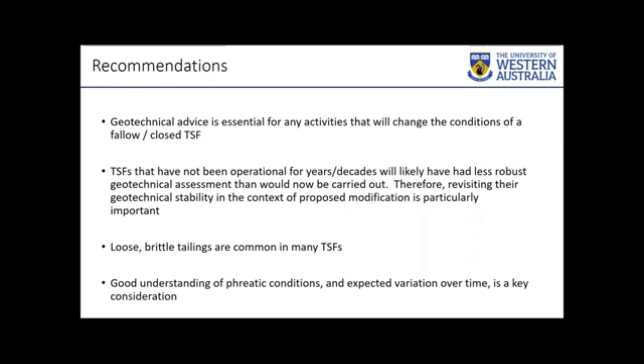I keep coming back to this, but I wanted to focus on the closure point of view - if you're the closure person, you don't want to be the one that comes in and puts a 1-meter cover on there and triggers it, because often people aren't going to talk about how it was badly managed for 30 years. Everyone's pointing at that last 1 meter of lift - that's usually what seems to happen.

Coming back to the beginning, I don't want to suggest that a high percentage of closed TSFs are sitting there waiting to fail. But there clearly is some percentage - I don't know what it is, it's low, but it's not zero. So you don't really want to start doing things unless you're sure you're not in that category, I would say, is maybe one way to put it.

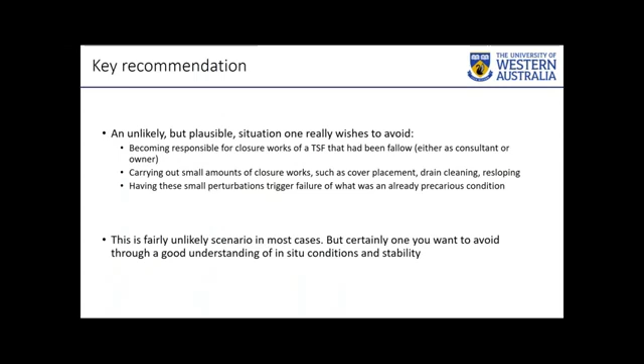So that's the presentation for today.